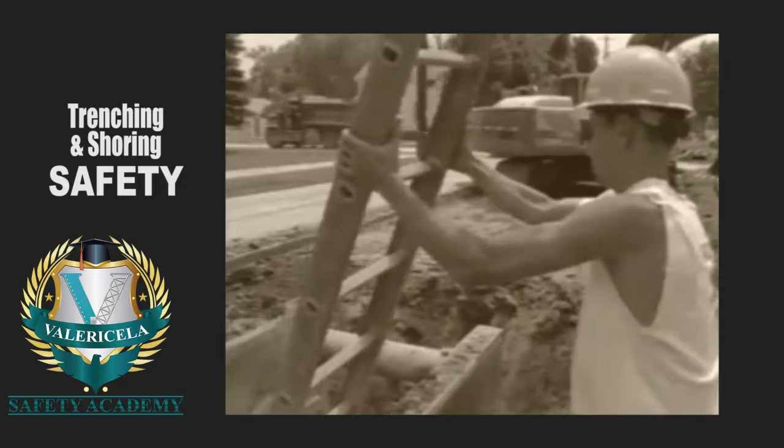In our day-to-day activities, we tend to fall into patterns. Sometimes we take things for granted and make assumptions. Do you assume that you know how the morning coffee will taste based on how it tasted yesterday? When you get to the job site, do you assume the equipment is going to start? After all, it did yesterday. And do you ever assume that just because an excavation didn't cave in yesterday, it won't happen today? Well, that's one assumption that can be deadly.

Just ask the family and friends of the 40 to 60 workers who die every year, and the more than 1,000 who are injured in trenching and excavation accidents. Almost every trench cave-in happens because someone doesn't follow the simple rules of trenching and shoring. In this video, we're going to look at how you can help avoid becoming the victim of excavation accidents and prevent others from being injured too.

This training is designed to help make you familiar with the rules found in the OSHA excavation standard. No matter what your job is, everyone who works at or near an excavation site should have a working knowledge of this standard. We'll start with definitions and a look at the dangers, and talk about what to do before excavation begins. We'll also discuss what's meant by the term competent person and what that person's duties are. We'll look at soil classification, protective support systems, general safety practices, and then we'll talk about emergency response procedures.

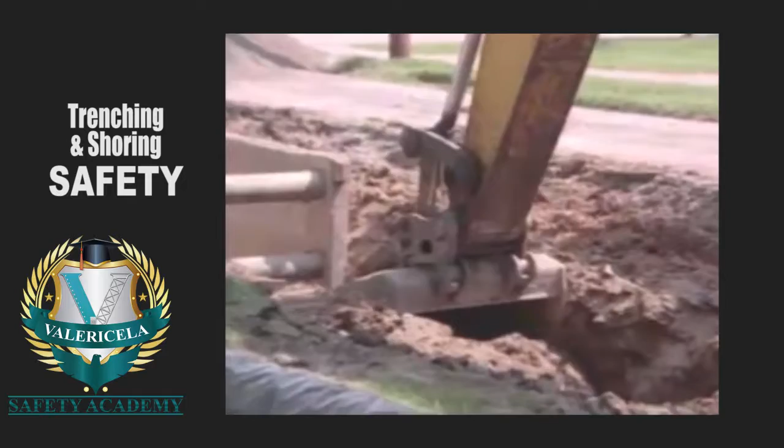A trench is defined as a narrow excavation made below the surface of the ground. The depth is often greater than its width. Shoring refers to supporting the sides of an excavation to prevent a cave-in.

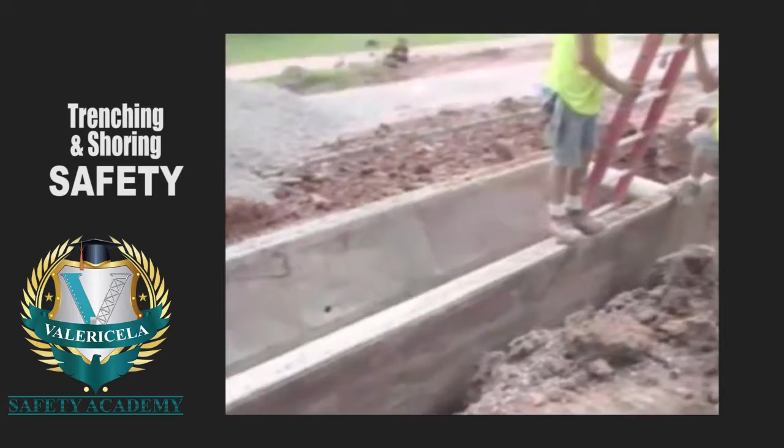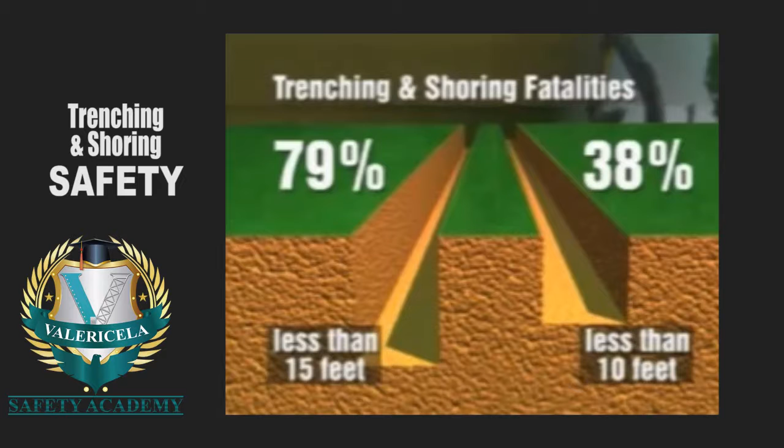Working in a trench is one of the most common and one of the most dangerous jobs in construction and utility work. Government statistics show that of all trenching and shoring fatalities, 79% occurred in trenches that were less than 15 feet deep. Trenches less than 10 feet deep were the site of 38% of all fatalities.

Well, the biggest safety thing is that everybody goes home safe every night. Nobody gets hurt during the day. Being conscious, soil conditions change by the minute, basically, as you're digging.

Some people think that if a trench were to cave in, it would be no big deal as long as it doesn't cover the person's face. But this is dead wrong, and here's why.

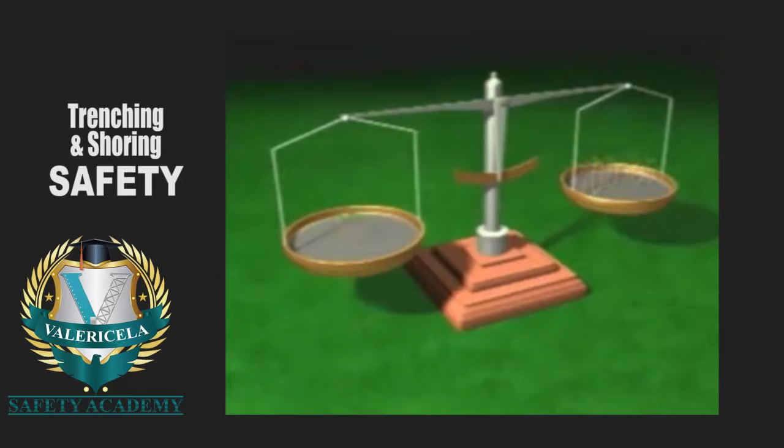A cubic foot of soil is not very much, but it weighs about 100 pounds. Just 1 cubic yard of soil weighs about 2,700 pounds, about as much as a mid-sized car. When 3, 4, or more cubic yards of soil press against the human body, there's enough pressure to prevent the lungs from expanding. Suffocation can take place in just a few minutes. Even if the person is quickly rescued, the weight of the soil can cause serious internal injuries. And if the person's face is even partially covered, the chances for survival are slim.

The key to avoiding accidents and injuries is to know the proper safety procedures and follow them every time trenching and shoring work is being done.

Before an excavation begins, the person responsible, or competent person, should look the job site over for extenuating circumstances like power lines, traffic patterns. They should know something about what to expect with the soils, water conditions, so they have the right equipment on the job for the excavation and also for protection of the employees.

Before excavation begins, local utility companies or property owners must be contacted. Most areas have a call-before-you-dig hotline number, so you can find out if there are any underground installations where you plan to dig. These may include underground water and sewer lines, telephone and electrical cables, fuel lines, and storage tanks.

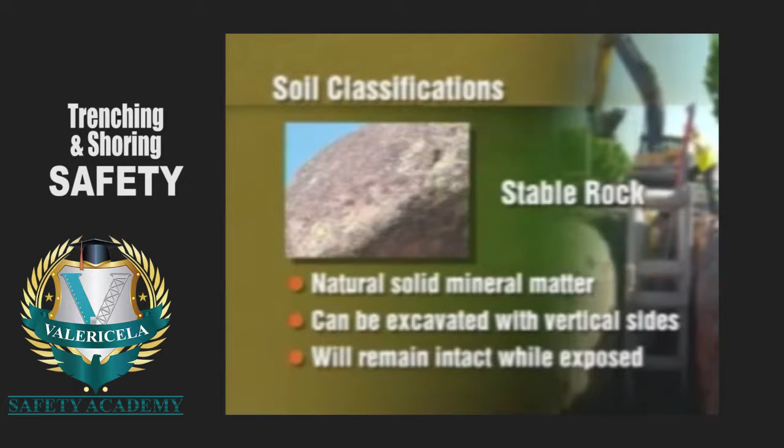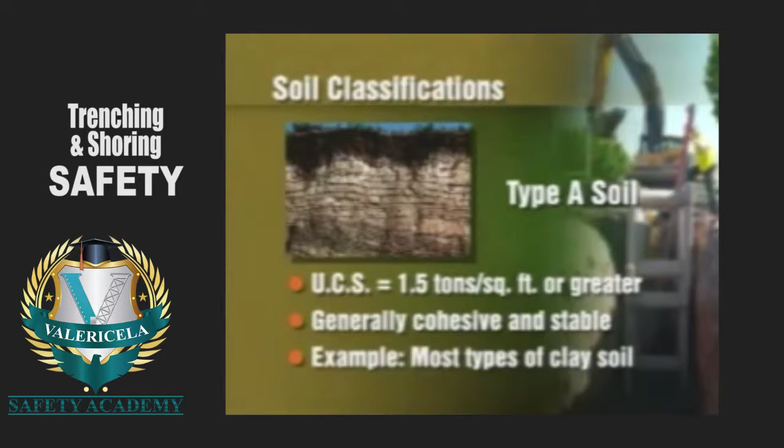Stable rock is natural solid mineral matter that can be excavated with vertical sides and will remain intact while exposed. Type A soil has an unconfined compressive strength of 1.5 tons per square foot or greater. This means that type A soil is generally cohesive and stable. Cohesive soil remains in clumps after being excavated. Most types of clay soil are classified as type A.

The unconfined compressive strength of a soil is a property of cohesive soils. It's basically the load per unit area that soil will bear in compression. The stiffer a soil is, the higher the unconfined compressive strength. Moisture content and unconfined compressive strength relate very closely. The higher the moisture content, typically the lower the unconfined compressive strength, and vice versa.

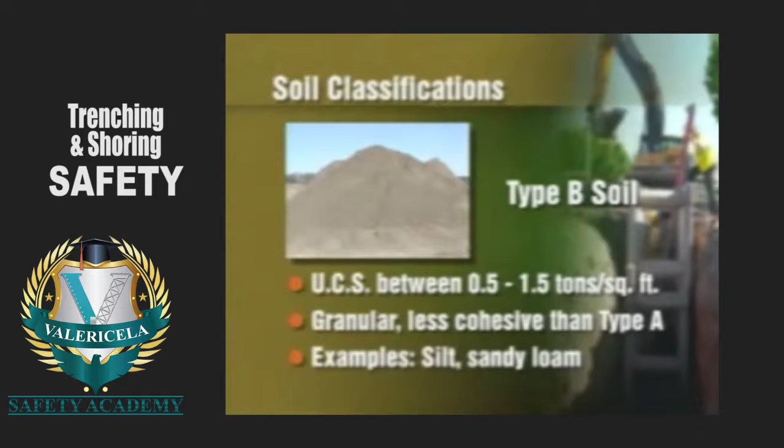Type B soil has an unconfined compressive strength greater than 1/2 ton per square foot, but less than 1.5 tons per square foot. This means that type B soil is granular and less cohesive than type A. Granular soil breaks up easily and does not stay in clumps. Examples include silt and sandy loam.

Type C soil has an unconfined compressive strength of 1/2 ton or less. Examples of type C soil include gravel, sand, submerged soil, and soil with seeping water.

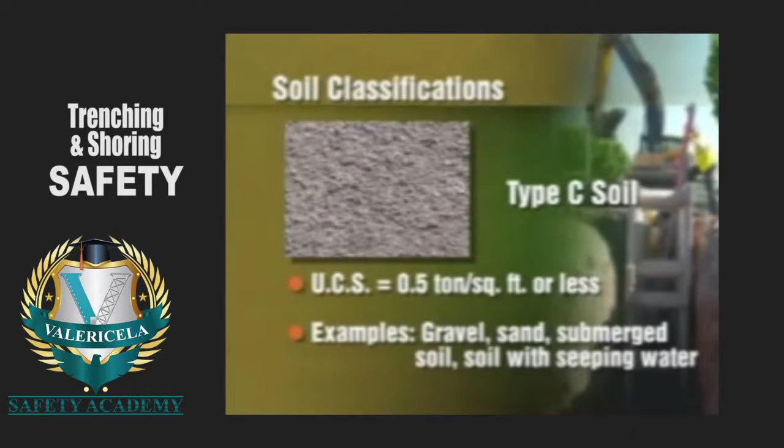To determine the type of soil, the competent person needs to make at least one visual and one manual analysis of the soil. He or she may also take a core soil sample, which may reveal the existence of 2 or more soil types. If there's ever any doubt about the exact soil classification, it should be treated as type C. Sometimes an excavation site contains a combination of soil types. Every location is different. That's why soil classification is so important.

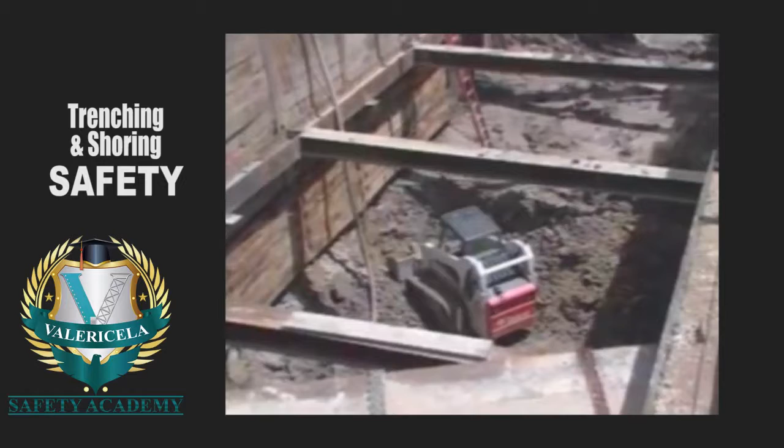There are many factors involved in designing a protective system. Soil classification is just one of them. Others are depth of cut, water content of the soil, changes due to weather and climate, and other operations at the worksite. OSHA requires that in all excavations, employees must be protected from cave-ins by sloping or benching the sides of an excavation, by supporting the sides of an excavation, or by placing a shield between the sides of the excavation and the work area.

No matter what type is used, the protective system must meet OSHA performance requirements. There are two circumstances when a protective system is not required. The first is an excavation made in stable rock. The second is an excavation that is less than 5 feet deep. This site must be inspected by the competent person who determines that there is no indication that a possible cave-in will occur.

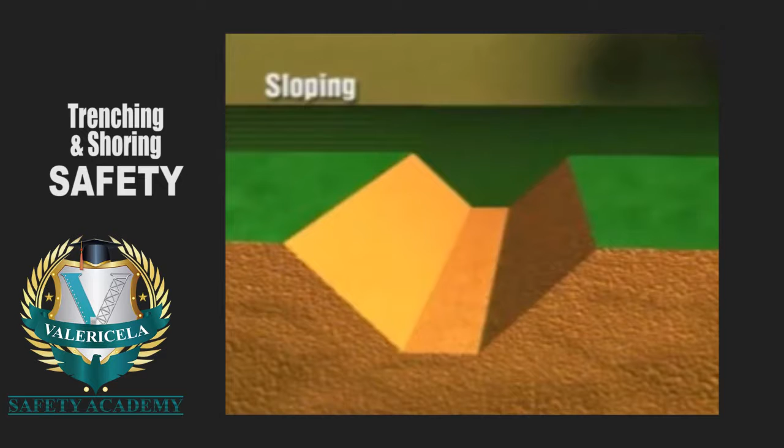Using the sloping method, the sides of the trench are angled away from the excavation to prevent a cave-in.

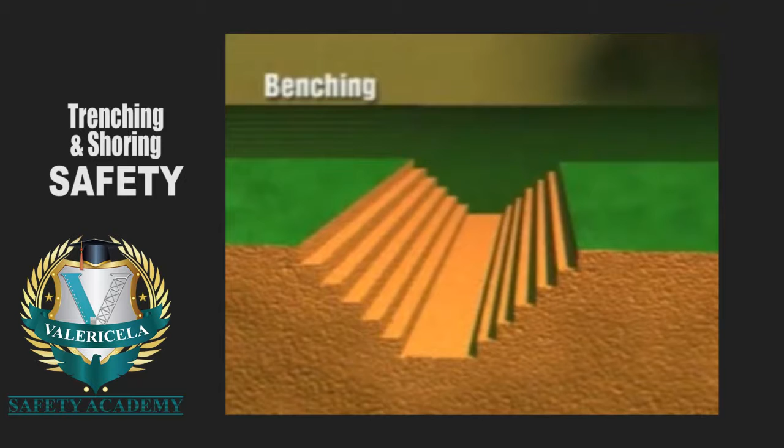The benching method uses a series of horizontal levels or steps to keep the walls of the excavation stable. The angle formed by the steps is determined by the soil type. The OSHA excavation standard lists the maximum allowable slopes for all soil classifications. Again, determining the correct soil type and slope is the responsibility of the competent person. But it's your life on the line, so you should know about these rules too.

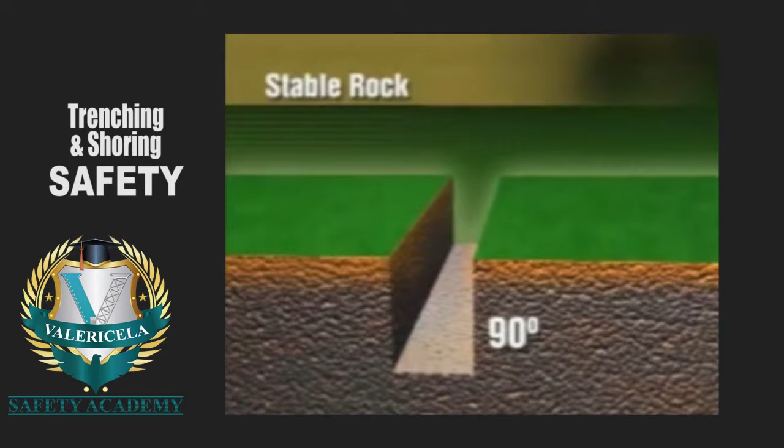In a stable rock excavation that is less than 20 feet deep, the maximum allowable slope is 90 degrees, which is vertical. In type A soil, the maximum allowable slope for excavations less than 20 feet deep is 53 degrees. This means that for every 3/4 of a foot horizontally, the vertical rise should be no more than 1 foot. By the way, the angle of slope should always be measured from the toe of the trench, which is the outermost edge of the excavation, not from the center.

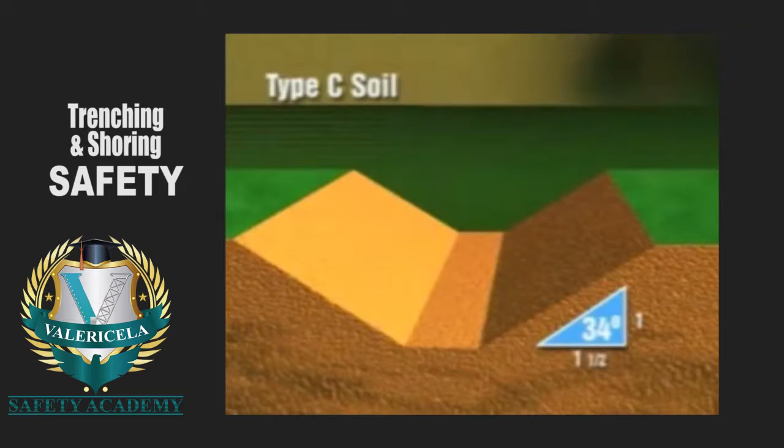In type B soil, the maximum allowable slope for excavations less than 20 feet deep is 45 degrees, or 1 foot horizontally for every 1 foot vertical rise. For type C soil, the maximum allowable slope for excavations less than 20 feet deep is 34 degrees, or 1.5 feet horizontally for every 1 foot vertical rise.

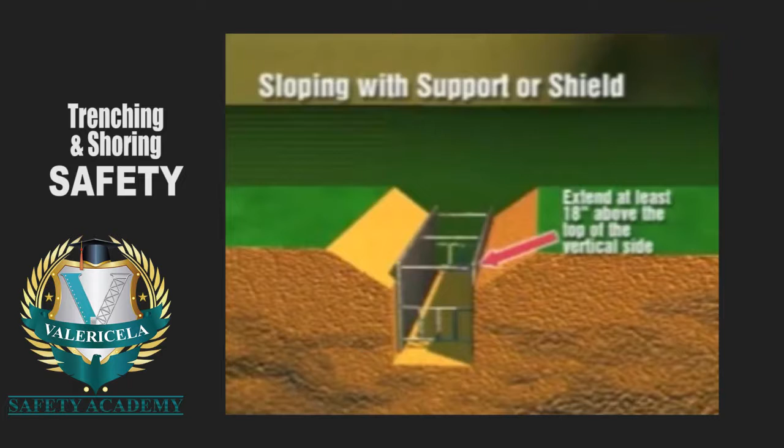There are a number of exceptions or special cases to the general sloping and benching guidelines. You should read about them in the OSHA excavation standard. For example, for excavations 20 feet deep or less with vertically sided lower portions that are supported or shielded, the support or shield system must extend at least 18 inches above the top of the vertical side. We'll talk more about supports and shields in a moment.

When an excavation contains layers of different types of soils, the usual sloping requirements need to be varied. The layered system must be classified according to its weakest layer. The OSHA excavation standard lists sloping requirements for layered soils.

Another type of protective support system is a shield. A shield is a structure used in excavation to withstand cave-ins and which will protect workers inside of it. Shields can be permanent structures or portable units moved along as work progresses. Shields used in trenches are usually called trench boxes or a trench shield.

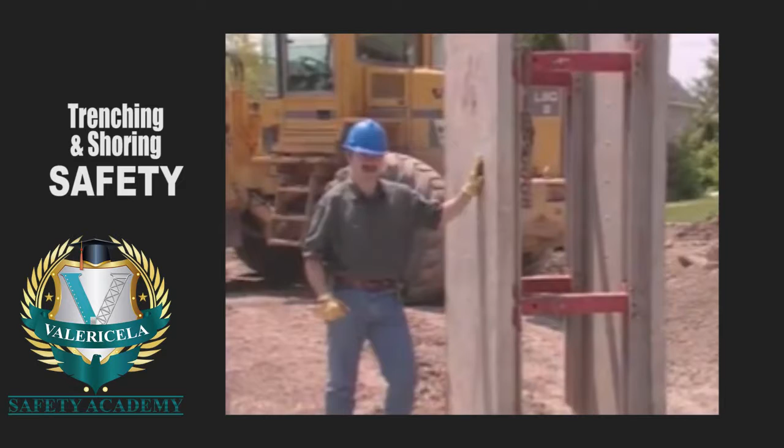Before using a trench box, it should be inspected by the competent person for damage or defects. If it looks like there are any problems, you should report them to your supervisor or the competent person, and the shield should not be used. Several types of shields are manufactured for specific size trenches. Make sure you're using the proper shield. Always follow the manufacturer's guidelines for installing a shield. Overloading the system could lead to a cave-in. No one should ever be inside a shield while it's being installed, removed, or moved vertically.

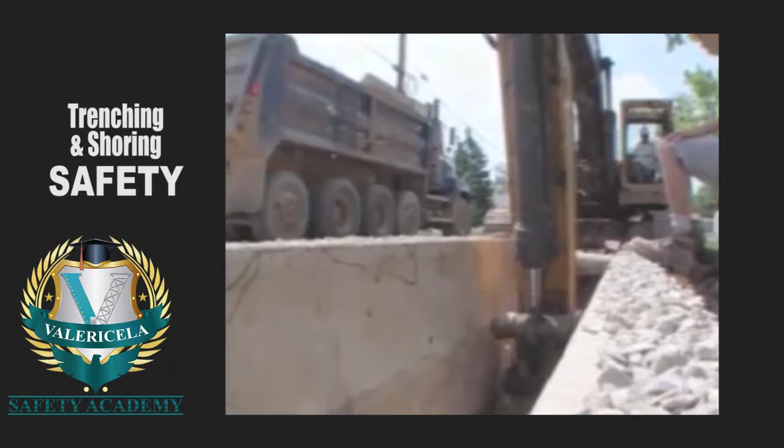Excavation is permitted below the bottom of the shield, but only to a depth of 2 feet, and only if the shield is designed to resist the forces calculated for the full depth of the trench. There must also be no indication that soil will become loose either from behind or below the bottom of the shield.

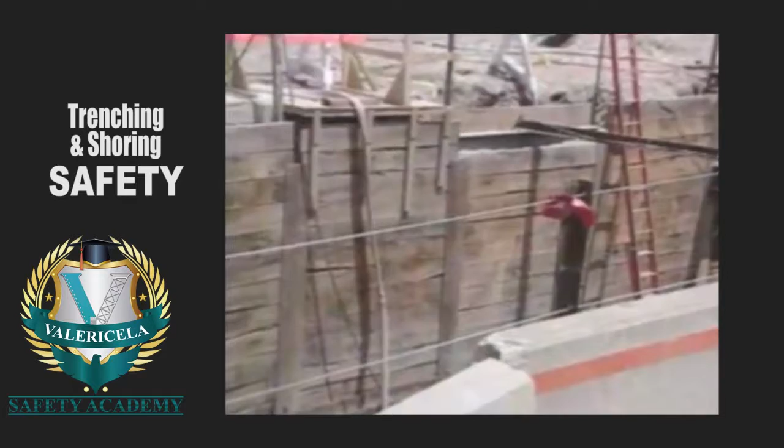Although not commonly used today, another type of protective system is shoring. Shoring generally refers to a structure that is built or put in place to support the sides of an excavation to prevent cave-ins. Shoring can be made of timber, aluminum, or other suitable material. Aluminum hydraulic shoring is a pre-engineered shoring system consisting of aluminum hydraulic cylinders used with vertical and horizontal rails.

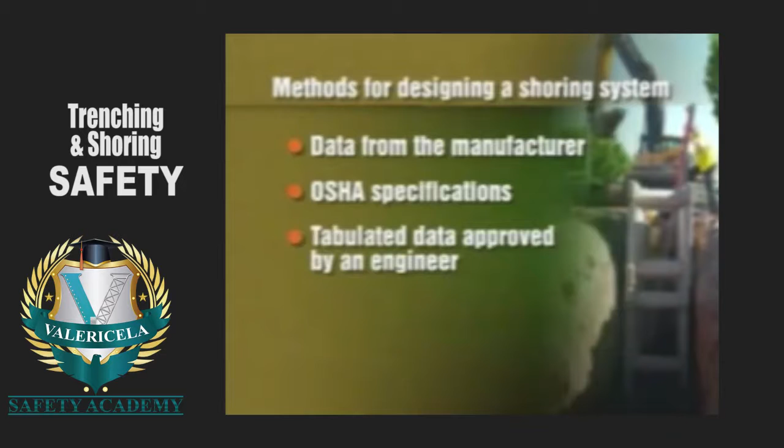For both timber shoring and aluminum hydraulic shoring systems, there are 4 methods that can be used to design the system. The first uses data from the manufacturer. The second uses OSHA specifications found in the excavation standard. The third method is to use tabulated data approved by an engineer. And the fourth is to have a registered professional engineer design the system.

Shoring systems should be installed from the top down. After the excavation is cleared, remove the protective system from the bottom up, taking care to release members slowly. As soon as work is completed, the excavation should be backfilled as the protective system is dismantled.

Here are some general safety practices for excavation work. First of all, know your job responsibilities. If there's a question about the excavation, don't hesitate to ask a supervisor or the competent person. A few minutes of downtime could prevent a serious injury or accident.

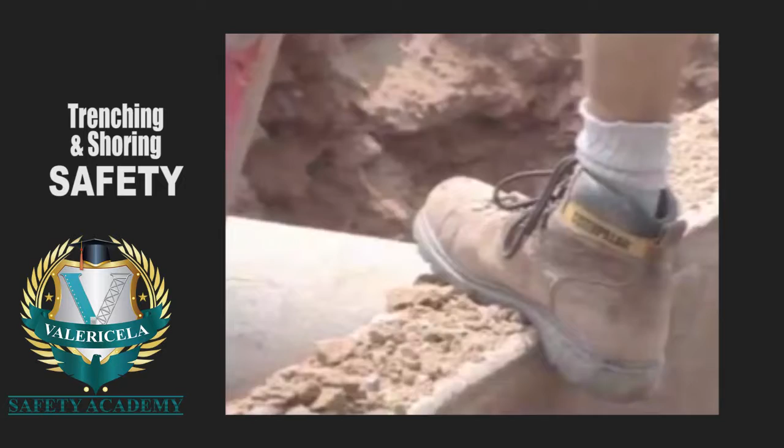Make sure you and all your coworkers have and use the proper safety equipment as required by your company policy. These items may include eye and ear protection, a respirator, fall protection equipment, safety shoes or boots, and a hard hat. If the excavation is near traffic, all workers should wear bright warning vests or other garments made of high visibility material. If necessary, a flagger should keep traffic flowing smoothly.

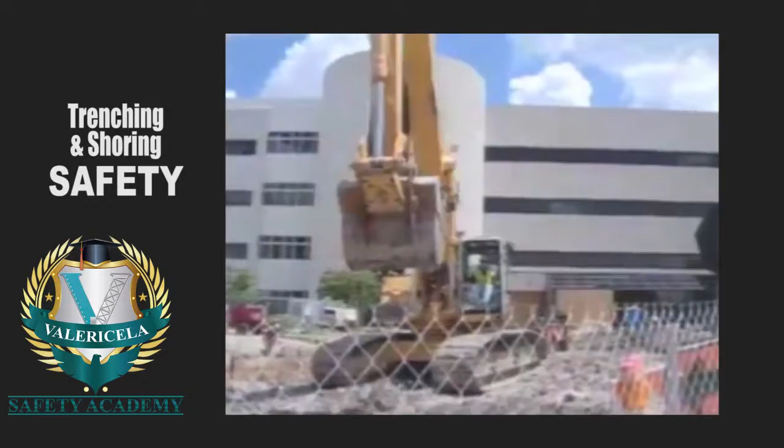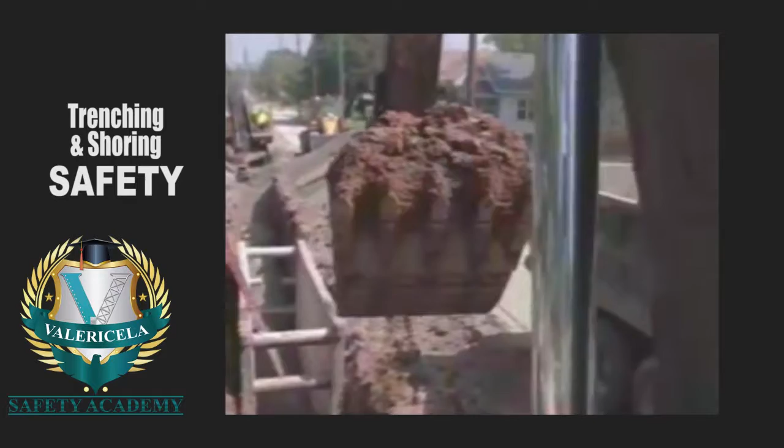A warning system such as barricades, signals, and fences should be in place to identify the location of the trench. If a walkway or bridge crosses a trench and is 6 feet or more above the bottom of the trench, fall protection must be in place, including guardrails and toe boards. No one is permitted under loads handled by lifting or digging equipment. Never work on a slope or a bench above another coworker.

This is only allowed after a protective system has been put in place to prevent materials from falling into the trench. Material or equipment must be kept at least 2 feet from the edge to prevent it from falling or rolling into excavations. Otherwise, a retaining device must be used.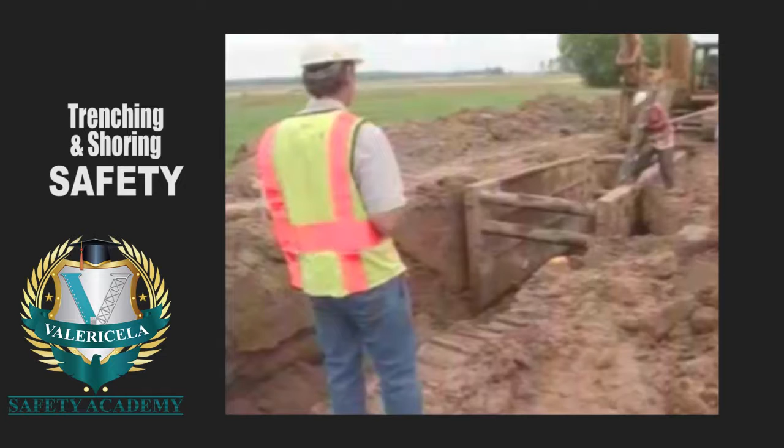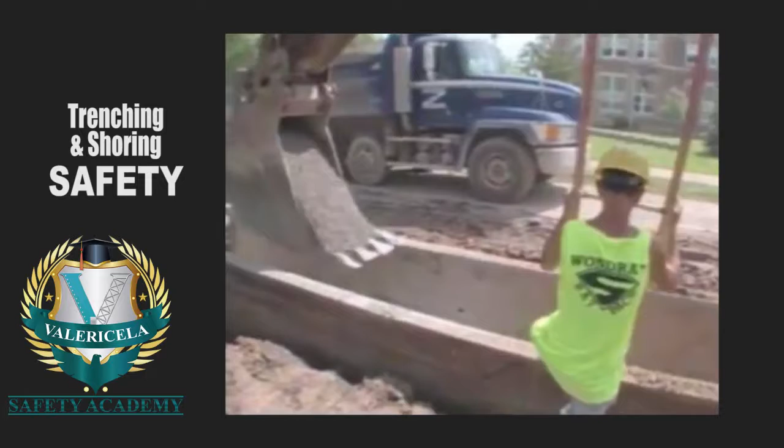If the excavation is 4 feet deep or more, an exit must be provided. An exit must be within 25 feet of every worker in the trench. Common types of exits include stairways, ramps, or ladders. If a ladder is used, it must extend at least 3 feet above the landing.

Changing conditions can quickly alter the safety of an excavation. If a heavy rainstorm passes through the area, the competent person must inspect the excavation before work resumes. Water can weaken the physical characteristics of a particular soil type. Surface water should never be allowed to enter the trench. If you see standing water in the trench, don't go in there unless adequate precautions have been taken to protect you from hazards created by the water.

If anything goes wrong, be ready to act instantly. Be alert for signs of trouble, such as tension cracks in walls, slopes, or ground near the excavation, ground settlement or sinking, changes in wall slope or bulging, spalling or crumbling soil inside the trench, excessive seepage and piping of fine soils, boiling of the trench bottom, creaking or popping sounds, or the bracing system bending and deforming. If you see any of these signs, don't enter the trench. If you're already inside, get out immediately and report the problem to your supervisor or competent person.

No one likes to think about an accident, especially in a trench. But you need to know what to do in case something does happen. Rescues can be tricky and dangerous. Don't become a victim yourself by rushing into a collapsed trench before it's stabilized.